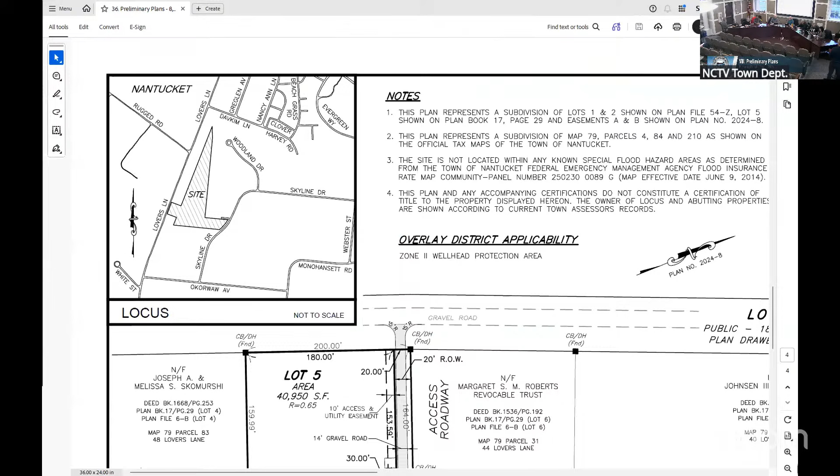So the property is located between Skyline Drive and Lovers Lane. I believe it's commonly known partially as Serenity Farm. There's a large barn out there, a house and a pool. Used to be some horse paddocks out there years ago. So the owner is looking to develop the property.

The preliminary plan here proposes 6 building lots. It is split zoned - a very small portion, a square portion of the property off of Lovers Lane is LUG 1. The balance of it is LUG 2. So that levels it out to work out in this way.

What you'll see overall in the property, starting all the way from the right, is a very long triangle. That property all the way to the right encompasses part of the town drainage system. There's a paper road under construction now for Lovers Lane, just as a general reference point. Then you've got a vacant lot in the middle, another vacant lot, and a very large, odd shaped lot in the middle right there. The purpose of that lot, possibly to be joined with another one, is to deal with ground cover. You can see in the middle there's a very large barn structure. They're trying to preserve that and work lines around it. So you'll see some funny lot shapes in there.

We've got all of the lots except for one accessing off of Lovers Lane. One property right now where the existing driveway is would come off of Skyline Drive. The intent would be to bring a small road off of Lovers Lane, access everything on the back with only one lot coming off of Skyline Drive. Other than that, it's a typical small rural road with a gravel road.

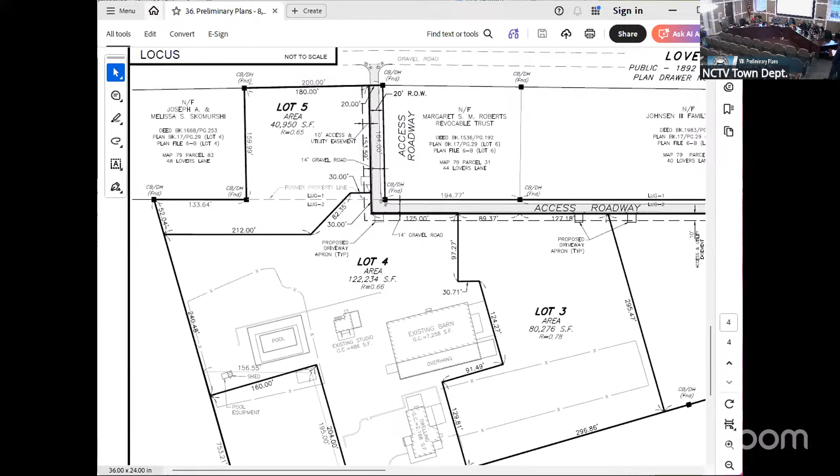So the lot at the end of the triangle with the stormwater, that's a LUG 2 lot, so it has to be 80,000 square feet minimum. But isn't some of that drainage on that point? So the drainage is on that—the town has an easement over Lot 1. If you look, it's hard to see on the plan, but there's a dashed line that goes around. That's all drainage easement, that's all the stormwater system.

Can they build on that? Can you build on that? We cannot build on it. It has to be left as open space. It's part of the town system, which is good for you if you're at the end of that point.

So I think that works to your benefit. Okay, thank you.

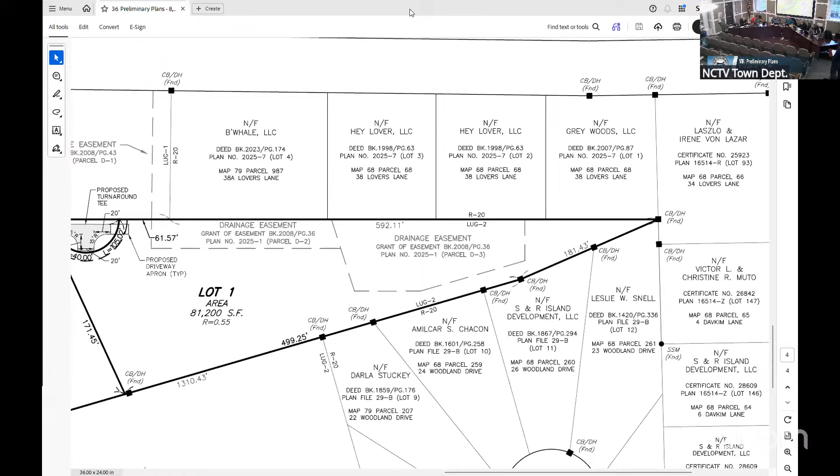Do we need to vote on this? Yes. Okay, so if there are no other board comments, I'd entertain a motion. Motion to approve the preliminary plan.

Did you have more to say, Haley? I don't mean to cut you off. No, I don't have anything more to say, but I think the things you really want to dig into will come at the next step.

So the motion's been made by Joe, seconded by Nat. All in favor? Aye. Aye. No. All right, that's three ayes and one no.

Can I just real quick ask Megan a question? I know Leslie's on and she recused—no, whatever—but this is what we used to do, and no one remembers the rural road alternative, and I've been thinking about the places we did it.

One of them is Westmoor Lane, that little thing that goes in there before you get to the actual Westmoor Club on the Westchester Street side. And that was...

...benefiting the look of the island, like not requiring these crazy paved roads that we didn't want. We wanted the narrower gravel, or maybe asphalt, but narrow, right?

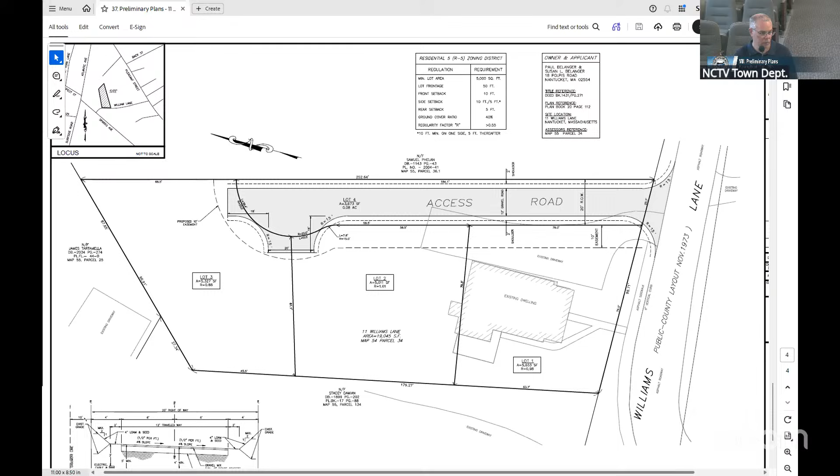Great, I prefer the rear lot myself. Let's do it - it's odd shaped lots. That's what it's for. Concerns, questions, anybody?

Well, again, I guess I would say - I don't understand why we're being asked to approve a preliminary plan of something. So a preliminary plan doesn't bind you or anybody else to anything. But it's not binding, but it is indicative. It's just confusing to say, okay, this looks great when I just don't understand it. It's not something that you're gonna do, so.

But it's part of the process, showing what can happen in a conventional ANR. That looks terrible, but it's legal. And it isn't really the right way to do it.

And then showing that proof so the real rear lot subdivision can go through the right process. Well, but it's also not possible to do this because it's short on frontage. No, that's there for the ANR. This has got enough land, it just doesn't have the frontage on the public roads.

So by doing an ANR, creating the road, they're getting the frontage off that road. Right, yeah, so we're creating the frontage. I understand.

Okay, so we're showing you a plan that if this plan were pursued as you're seeing it on the screen, it would require plan road waivers - waivers on layout width, roadway width, and several other things. But given the excessive size of this lot, we could come in here with a fully compliant 2-lot approval not required plan with a 40-foot layout and large cul-de-sacs, which would get us to the same place.

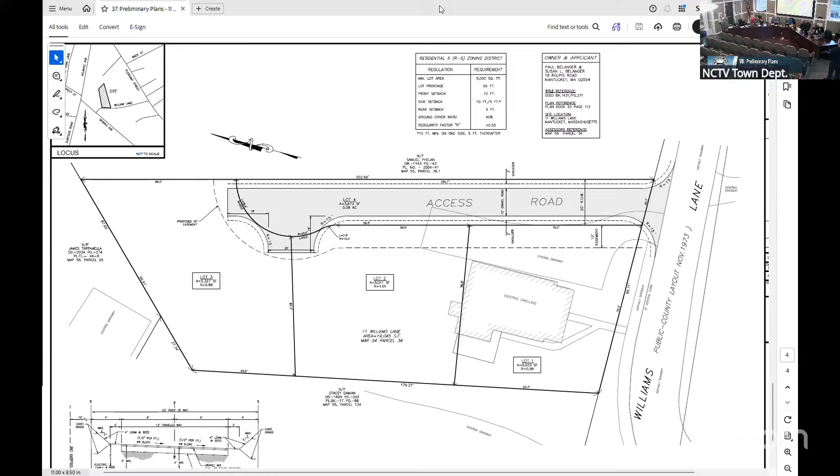And if it could just be clear in the minutes that this is not being asked to be built, right? Yeah, that's correct. So the approval of the preliminary plan is not binding. I wish we could come up with a new word for that, because we're approving a proof plan that isn't going to be what actually comes forward. I didn't come up with the process - the State of Massachusetts did.

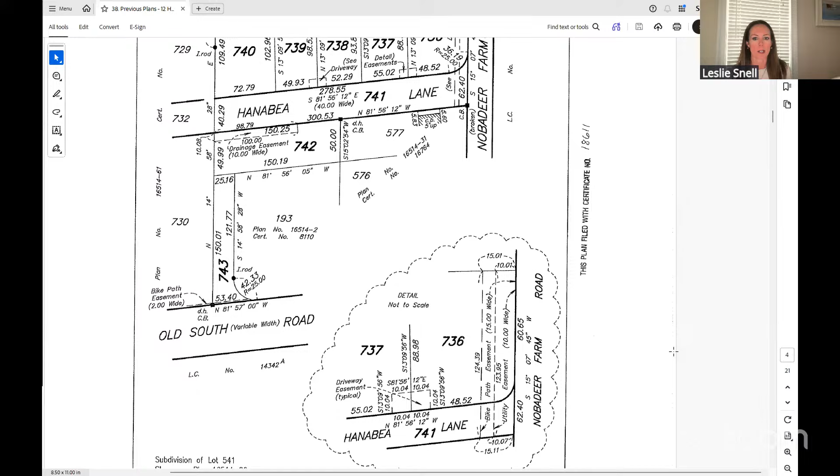So some of these easements were required, and those easements have since been released. I think this may be the last one, and it really does not make any sense to hold them to that easement at this point in time, and I would recommend that you release it.

Great, thank you, Leslie. And to add to that, thank you for dusting that one off the shelf for a little bit. So Nobadeer Farm Road is 30 feet, which is unbelievable. How did that just never get fixed 40 years ago?

I have no idea, but that's insane. So when the coffin pit got done, that's when the infrastructure you see now was put in from that approval. So this is way older than that. This is pre-Nat Lowell, exactly. I was writing letters in the paper. But this is because of the original plan we were trying to get some land to do something, but no one knew what we were doing yet. I don't even think Small Friends was built when this was done, but I think New School might have been, not sure.

So anyway, I'm in favor of obviously removing that, Dawn. It's good for people to know how these things happened, especially when it's in this century. Which is actually interesting - not one of those 1799 roads, Joe, look at that. Anyway, anybody else, questions, comments?

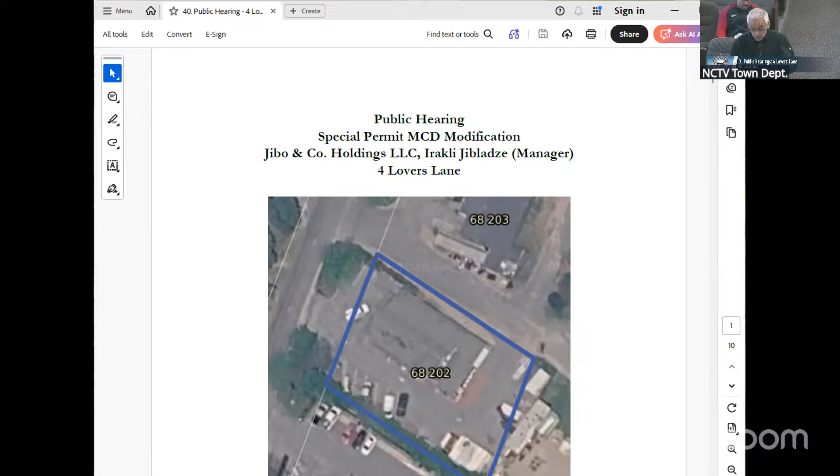This property is located at 4 Lovers Lane. We were before you last month and received approval for an exterior seasonal, six months at a time, area to be located on the property for a workout area on the exterior of the site.

That required the reallocation and relocation of some of the parking. That was discussed at the last meeting. At that time, the fact that there was a tent that had been erected on the property, and I had not asked for a special permit for the tent, as the tent would exceed the 30 days allowed per calendar year.

So we're before you tonight to ask for the erection under 139-2A of a tent for a period exceeding 30 days per calendar year. Applicant is requesting to erect a 15 by 30-foot tent on the subject property seasonally for a period of six months. Having said that, the tent is currently in place and had been erected prior to the first special permit meeting.

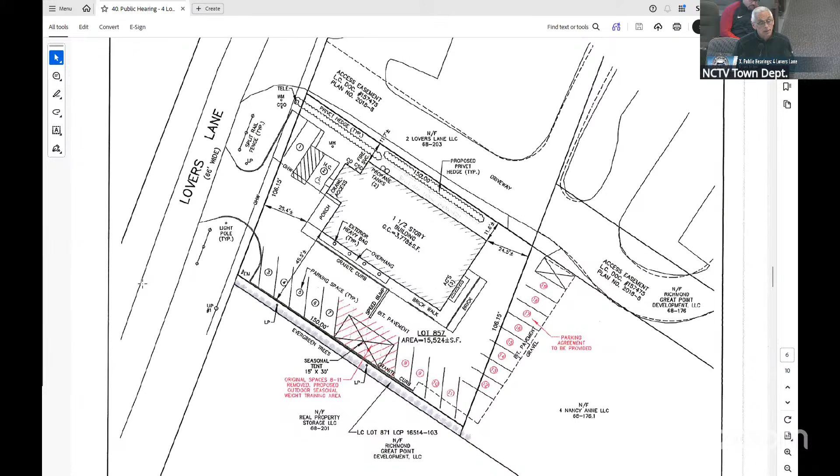Before we get to Andre, Paul, did we discuss a one year review? I believe we did. If we didn't review that first, we should have that after the first season of operation. So it would be number 6 then, Meg. I think this is definitely appropriate. Even though it's not actually tied to the restaurant, I think it would be tied to the last approval. So what are we looking at for time that you really want?

It's 6 months. No, no, I'm talking about Andre, the hours of operation.

You have to introduce yourself for the record. I'm Andre Dobrczynski, owner of the gym, 4 Lovers Lane, Verdun Training Center. So the population that we attend, mostly workers in Nantucket, they come at 4:30 AM and leave before 7 AM.

That's the gross part in the morning, when there's nobody around. Then after 6:30 PM, which is all workers that finish their work at 6, 5:30, take a shower and come to the gym, and they stay until 10, 11, and stuff like that. So those are the hours most important for us to attend these people and not get too crowded inside. Plus it's way healthier, especially in spring to summer and end of summer, to be outside instead of inside. They look for those times to be working out, so we wish to attend our people the best we can.

Before I go to the rest, did you say 10 to 11 PM? I wasn't sure. So 4:30 to around 7:30 is the gross of the workers that leave to work in the morning. And then after that, after 6:30, I had people leaving at 11:55 on Friday.

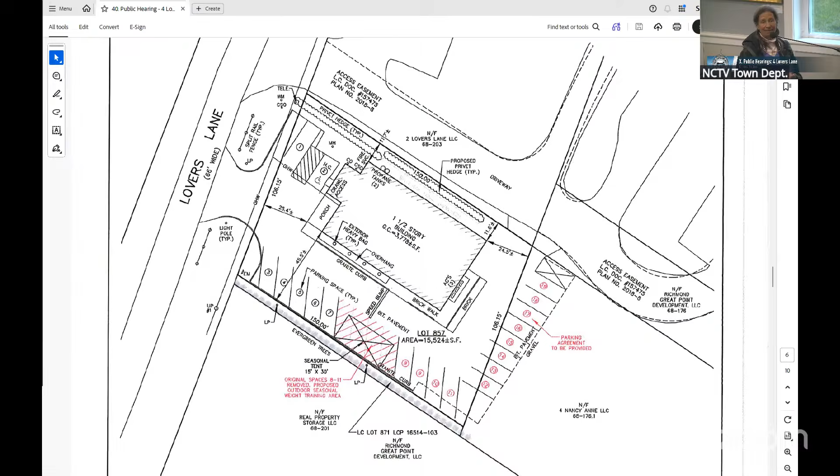So then the idea is, well, okay, is there a time frame from 10 to midnight that seems available, or pre-7:30, outside of the noise bylaw?

I guess my thing would have been to see 10:30, 11 o'clock as something that would be part of something outside of what already covers outdoor situations with the night skies and the noise bylaw. So those were just my thoughts. Okay, thank you.

I wanted to ask a question of Billy and Meg. The conversations that were had where people came in to talk about this application, I think my understanding is it was about parking. Did anyone come in to complain about noise? No, no, it was all parking, just related to parking. They didn't have a problem with the outdoor gym. Nope. No. Okay, thank you.

Okay, thank you. Yes, Mr. Sullivan. My name is Brian Sullivan, and I want to speak in support of the applicant and the longer extended hours, to the point that Mr. Toppa made about what he's doing with the kids in the community and offering spaces and opportunities. So whatever later time you're willing to go with the noise bylaw, if there's adults in the gym and the kids want to be outside or vice versa, I think his service to our community is incredibly admirable, and I appreciate that he's here, and I hope that you can offer him the widest window with a review at the end of his 6-month window. But thank you. Thank you.

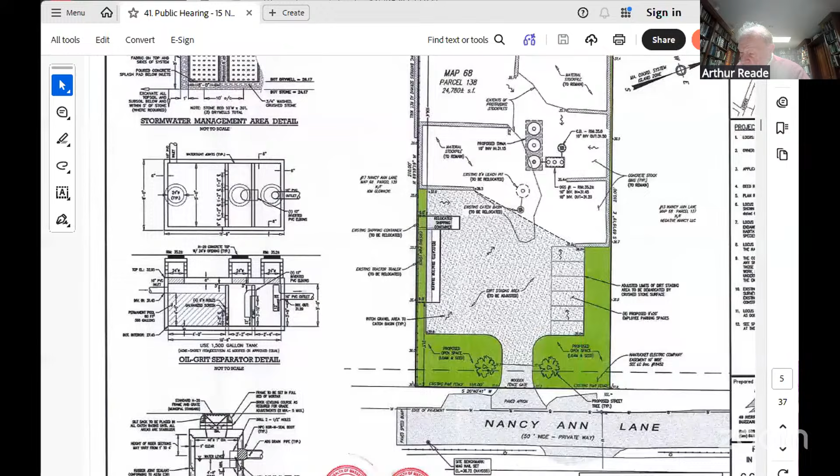This is for the operation of the tenant who has a yard here that is used for commercial storage of commercial or other construction supplies, stone and other aggregate, sand, piping materials, other general heavy construction equipment, heavy supplies, that is, not necessarily heavy machinery.

Obviously, trucks come in there in connection with this. The lot at present is a vacant lot. It's actually being used by my client at the present time, and we've come before the board with this application for major commercial development in order to lay out the plan and show exactly what we're doing and ask for the permit.

This property had been the subject of a previous major commercial development, which involved both this and the adjacent property at 13 Nancy Ann Lane. That was a large building that was going to be constructed, and that has since been abandoned by the owner, who has sold the property at 13, which is now owned by a landscaper.

And this property is being used, as I say, by the applicant, called Tonka Truck LLC, for the purposes that I described. The site is not open to the public. There is no public access. There are no on-premises sales, and there are no structures proposed on the property.

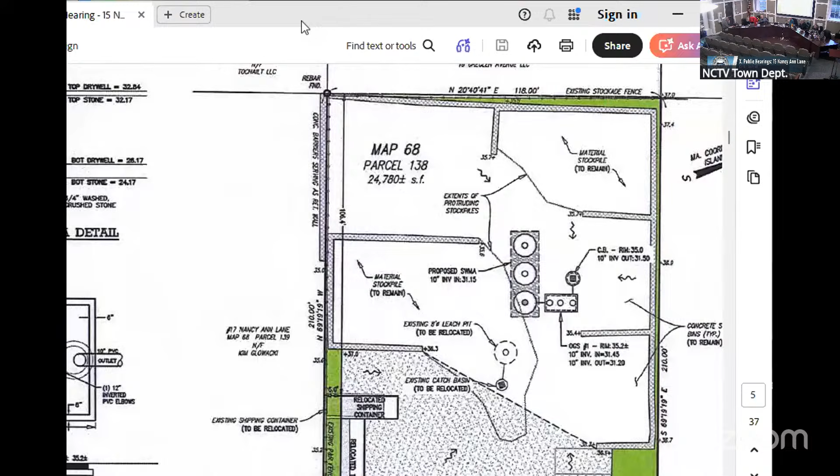So right now, we don't plan them. Yeah, because I- so, no, you don't. Oh, so that's the existing and that's the- yeah, so, but by moving that, I mean that's the right place for that one. Right, they just need another one, here. That's what I'm saying. Okay, not moving it, but add. Yeah, just add on, that's my more question.

We would have to add a catch basin where the parking spaces are shown and then run another pipe to that little grit separator, if we were just going to pave where the parking spaces are.

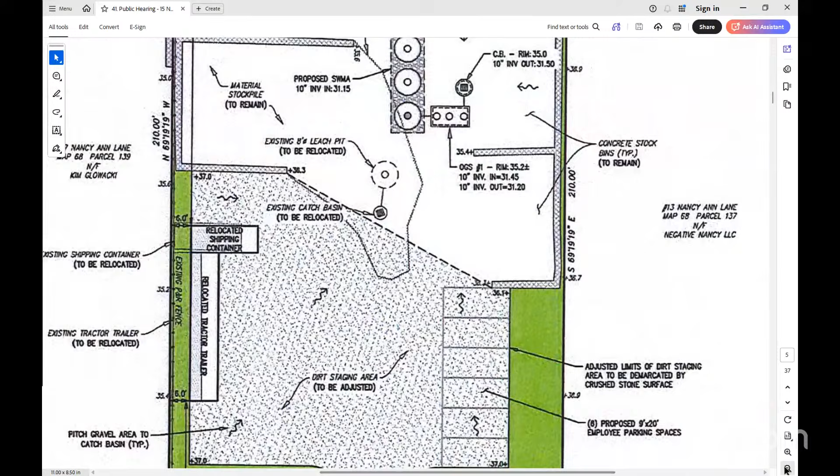Thank you. I mean, I'm in favor of it, and I think we've been remiss in doing it earlier, to be honest.

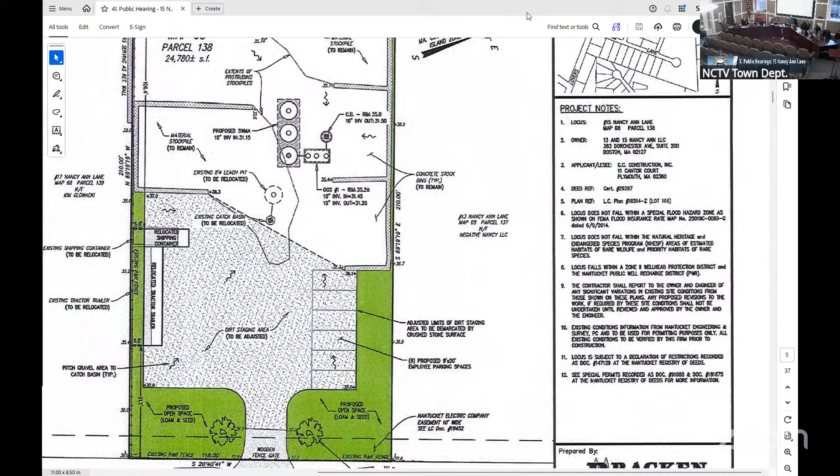Board members, we good? Public? Anybody in the public before we close the public hearing? No more hands are up, no, online.

Okay, so I'd entertain a motion. Motion to close public hearing, seconded by Nat. This is to close the public hearing. All in favor? Aye. That was unanimous.

So I appreciate all the discussion about protecting the wellhead. I completely support those ideas.

I'm trying to think about how this storage use of these materials lives happily in this area that is gentrifying into more of an affordable housing area. We really want to have dignity for the people living in these more affordable areas. Can we have screening? I just think we have to give this a little more attention to the livability and how well it plays with its neighbors, because we are encouraging this. We want this to become a nice neighborhood.

Yeah, I don't disagree. I think, Hillary, you have to remember the uses that exist for this neighborhood and have existed for a while, like Cape Cod Express, huge big trucks, there's a storage facility next to them. Right, but it is changing, and we've got Dylan pointing out that we have another application where we're going to have houses, there are houses right across the street. No, I agree, things like screening, I don't know, what do you think?

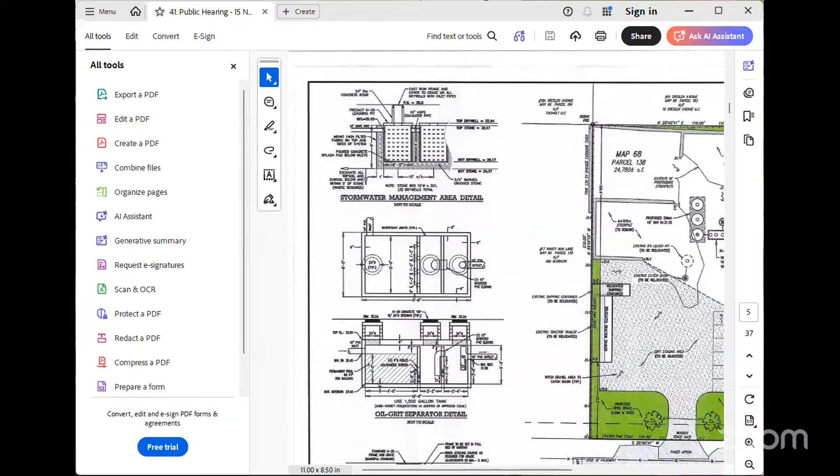Okay, Dawn or Chris, can you let us know what your planning for screening is? On the plan, we're proposing 2 street trees. As you know, there's nothing in that place right now, just grass in that frontage area. So I guess I would leave that up to Chris, what he thinks and what screening he would be accepting to put in there.

Well, I don't have any objections to some more landscaping, whether we put a hedge across the front, or even a small berm—maybe like a 4-foot high berm—and then put some evergreens on top of the berm. So when you're driving down the road, you'd be looking at maybe a 5 or 10-foot grass area, and then a small berm with the shrubs on it with some bark mulch. And then we would probably do some kind of split rail gate fence in the front for now.

I would note that this is round one. If we continue to go forward, there'll be a second round. We just couldn't get it together quick enough. So that kind of answers the screening question.

The area is still heavy commercial. There's the fish company, there's FedEx. I don't even know what's in the old Frito-Lay building anymore, but there's certainly some kind of commercial activity going on there. There's a landscape company that's just moved in, putting up a storage building as well. I have no idea what's going to go on to the left of me, which I would think would be the west.

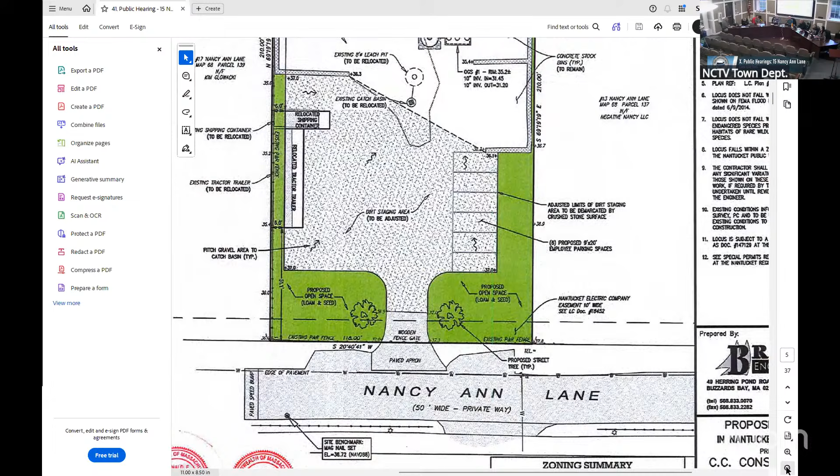As people have mentioned, it's an extreme improvement from 10 years ago. The other part of this is that I believe we have 60 days to complete this work from the approved application—is that correct? No, I don't think so. Okay, I don't even think there is a time frame, is there? Do we—thank you for those comments, I appreciate them.

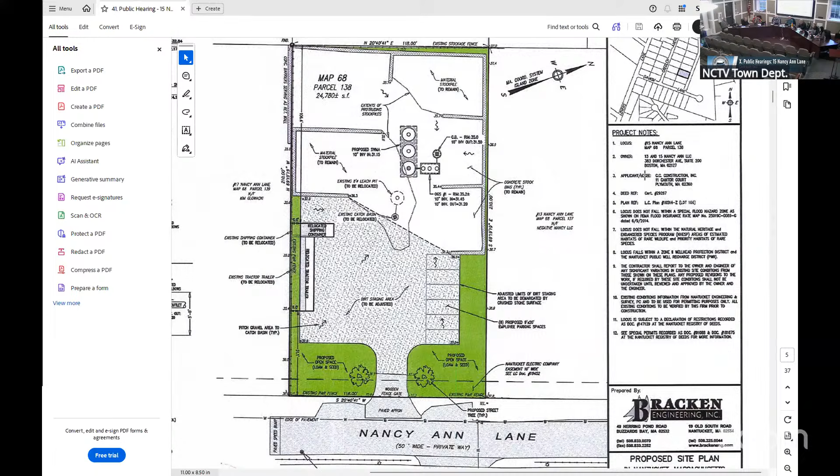The shipping containers and the trailer—are we permitting those under this MCD? Yes.

And Chris, are you done? I think so. Regarding the screening, I do appreciate that all along that side of Nancy Ann Lane there are comparable or worse uses of land, but all of the people who live in apartments on the other side are looking into those areas, and we'd like to improve things for them, slowly, bit by bit, in little ways as we can. So I appreciate the trees, the grass, and I would just suggest I'm fine with staff approving some kind of a plan for screening that you think will be friendly to the applicant as well as respectful of the neighbors, and move things in the right direction that we want to see this area going.

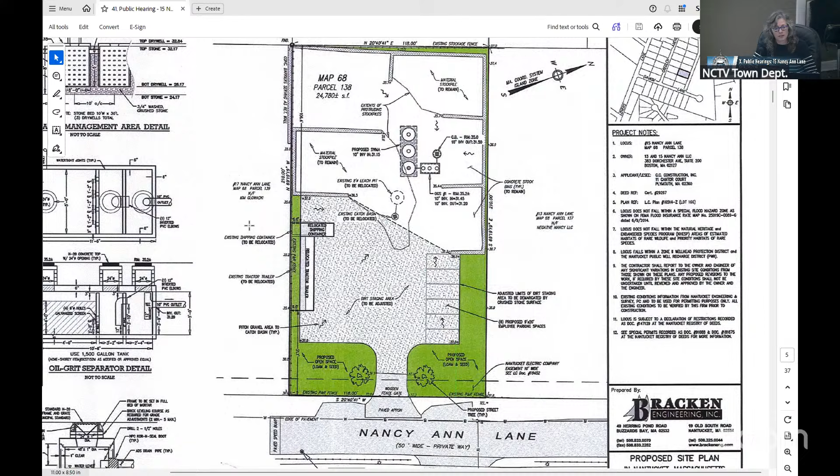I agree, I think a small berm would go a long way in helping the look, the concern about blowing dust into the neighboring residential areas, and it would attenuate a little bit of the noise. I think as you face the property to the left, I don't know why he would screen there unless he didn't want to see the junkyard. I think behind him is contractor shops. And to the right of him as you face the lot, we're not sure what that is—that could be his phase two, I don't know.

I think we start with the screening in the front and along the side. Along Nancy Ann, that's what I mean by the front. Okay, and on one side I'm not sure I would until things change. Yeah, screening along Nancy Ann is what I'm most concerned about.

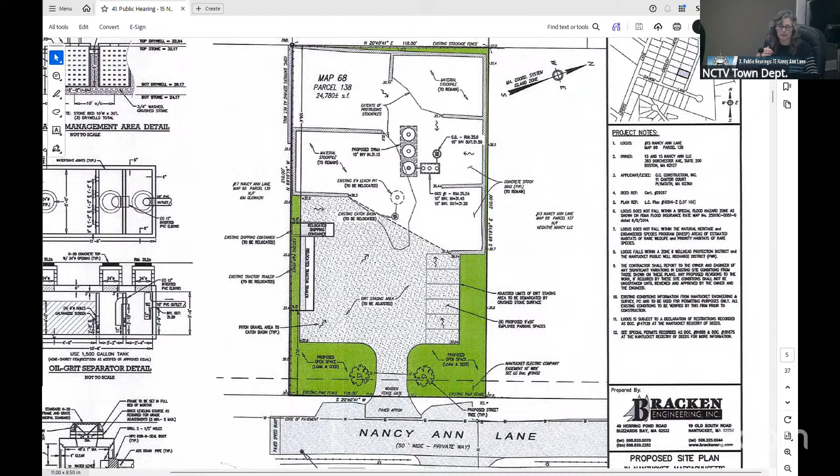And we can, you're fine with staff approval on that. I am, and even a fence makes a big difference. Sometimes a fence is better than vegetation that deer eat, and we don't need this to look like a golf course. No, but it definitely can look nice.

With a little bit of work, so that's it. We'll have staff approve, and yes, this.

What this looked like 11 years ago - Joe and I used to go to birthday parties over there. Joe's a lot younger than you. No, he's not - I used to work there when I was 14, in Sconset, cutting hedges, and he was over there. And we used to ride mini bikes at the parties at Naushop, way before it was Naushop.

We've slowly moved everything out of the real residential Nantucket and ended up out here where it used to be, but much less. And of course towards the Coffin Pit and the airport bunker area has been the natural movement of what used to be Reese's, Toscano's on Pilgrim Road. People don't even know that. So it's like, I get what Hillary's saying.

She's not wrong about saying the people that are living there, they have to look at this. I just don't know what the answer is. When you go to Boston and stay in a hotel and look out the window and there's three big gigantic cranes building a building 10 feet from your window - that's like what, and those people are paying $250 a night to stay looking out at that.

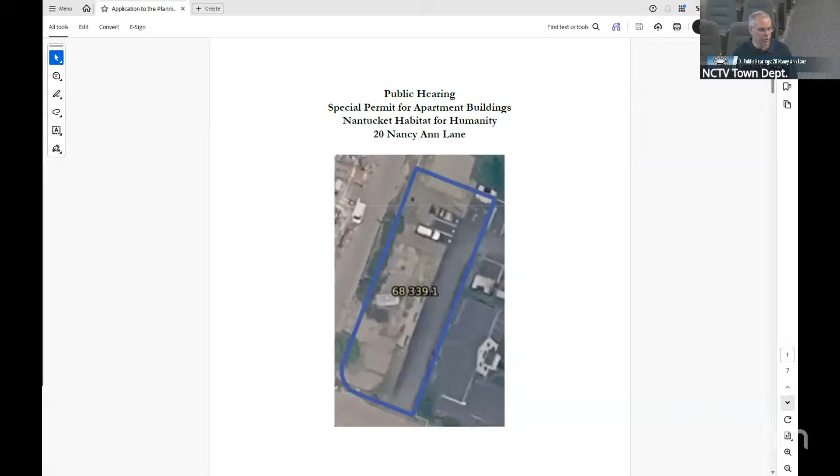Good evening, Dan Mulloy again. So before you this evening, 20 Nancy Ann Lane. Habitat for Humanity, as you heard a few minutes ago, is under contract to buy the property as well as under an agreement with the Nantucket Affordable Housing Trust to acquire the property, putting some restrictions on this in terms of affordability.

So what the application is requesting is a special permit. In the CN district, apartments are allowed by right, but require a special permit from the planning board. There is no relief requested as part of this application—it's strictly a planning board review for the special permit process.

The proposal is 4 buildings, 2 bedrooms per unit, for a total of 8 bedrooms. We're providing 8 parking spaces as required on the site. The site has enough area to comply with zoning for the 4 units—you might even be able to get 1 more, but we're only asking for 4.

Access to the site is provided by Nancy Ann as well as the existing driveway complex as part of the Richmond development. The driveway and most, if not all, of the infrastructure to support it is already in place—the roads, the utility stubs. Essentially it's a vacant building lot pad ready to go. So that's the application: 4 separate dwellings, 2 bedrooms apiece. It is Habitat for Humanity, so obviously it will come with some restrictions in terms of affordability. With that, I'd answer any questions.

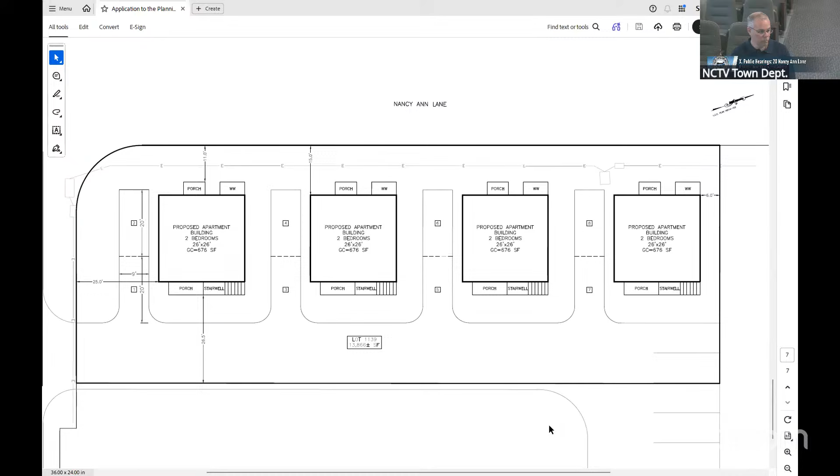Thank you. Board members, questions? It's pretty straightforward. Is there anyone in the public who wants to speak to this? No hands are up online. All right, got incoming.

Welcome. Hi, good evening. Thanks for letting me speak, everyone. Sorry, Campbell Sutton—I forgot who I was. My apologies.

I know it's probably not appropriate to speak against the design on this, but I'm gonna jump in anyway. The look of this reminds me of the road approved with 5 or 6 buildings—Rupert's Way, on Old South Road. As you know, over time I've spoken about stacked parking, and I personally don't think that it lends itself to friendly neighbors.

It usually ends up with cars trying to find someplace else to park because they don't want to park the other person in, or they have to leave early. So there's a lot working on that. And the thing that came to mind on that Rupert's Way is something more along the line of...

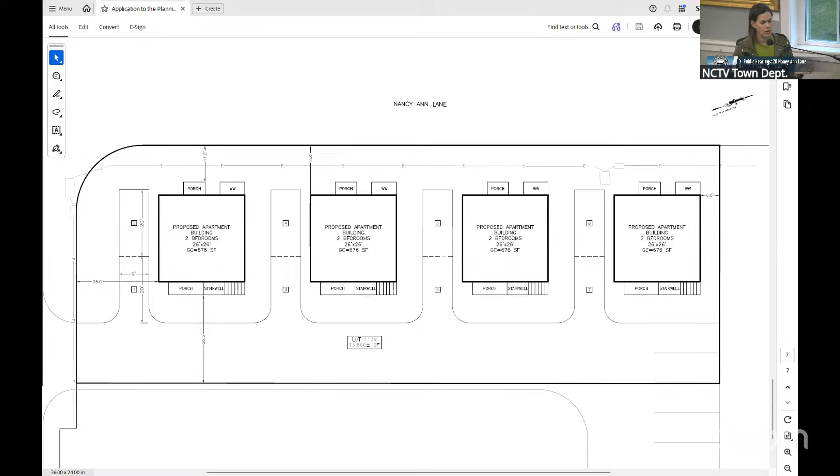Liza: Hi, I'm Liza Haddon. I think that the parking could work either way. I think if there's enough room between the buildings, it would be great to do them side by side, but I'm not sure there is. I think one thing you've discussed on previous apartment buildings is storage outside or underneath the buildings, and I'm not sure how much jurisdiction you have about that. But having a small apartment means there isn't a place to put your scallop rake or other beach stuff, so having something underneath the building or on the side so you can put your stuff there and it's not just in the yard would be great.

Great, thank you, Liza. These do have basements, correct? Yeah, all the buildings have basement spaces with walk-downs, so there's basically storage there. These are single-family homes by definition, but they're apartment buildings, essentially single-family apartments. So basement for storage and then two floors above that for dwelling.

Correct, basement storage, two floors above. We looked at other options for laying this out, between trying to provide parking, separation, and code requirements between buildings. Trying to squeeze everything and double up the parking just didn't fit, but we wanted to have as much green space as possible here as well. Yep, I mean it's really close, just a little bit here or there that we couldn't get.

I agree with Steve, if we could get the tandem parking, you'd have more yard space, but maybe there's something. For reference, if anybody's seen it, these buildings are going to be similar to what they put up on Waite Drive, for a visual, that's the intention. Or every other one, perhaps, with tandem parking.

Mr. Chair, we have Christy Parentella with her hand up online. Can we give them the option in the condition about the parking? Yes, you can give them the flexibility of that sort of site plan change through staff approval. Okay, great, if they finesse the plan a little bit more and massage it and it comes out, I think that's a win. Something to look at, to investigate. I agree.

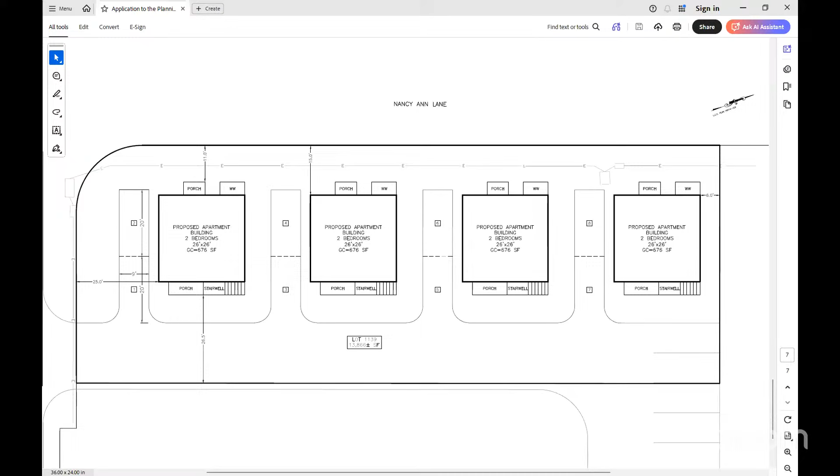Hi, thank you, Christy Ferrantella, the housing director. I just wanted to comment on some of the previous comments around parking. These, as mentioned, are acting as single-family homes. They're going to be two bedrooms sold to a family that earns between 50% and 80% of area median income. So I think the stacked parking makes sense since it's going to be basically one person per bedroom, and it's regulated through the state's Executive Office of Housing and Livable Communities, so it wouldn't be separate people able to share the units. I just wanted to give that information as background. Thank you, Christy.

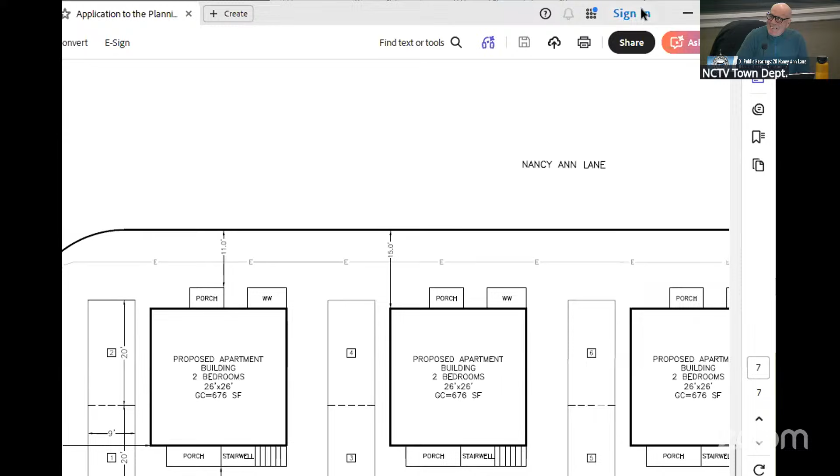Anybody else in the public? Steven, do you want to comment, or are you just stretching your legs? All righty. No one online? No, no more hand raised. I'm stopping sharing. It's really good.

I would entertain a motion to close the public hearing now. So moved, Mr. Chair. Second. Motion made by Joe, seconded by Hillary, all in favor? Aye. Aye. Can I get an aye out of you, Stephen? Aye. Thank you, that's unanimous.

Alrighty, I just want to thank Christy for letting us know about the affordability. That was one of my questions because it wasn't in that application. I think they go on the SHI list too. Yep, they go on the SHI list now. That's a bonus.

So I'm fine with this. Great, Stephen, you want to form your motion? Sure, I'll make a motion that we approve subject to findings and conditions of staff, with a modification to include, at the applicant's option, tandem parking versus stacked, and any configurations that will work, subject to staff review, noting that they may also use the 17-foot length parking space if available for them.

Second, for each unit. All right, motion made by Stephen, seconded by Joe. All in favor? Aye. Aye. It's unanimous. Thank you.

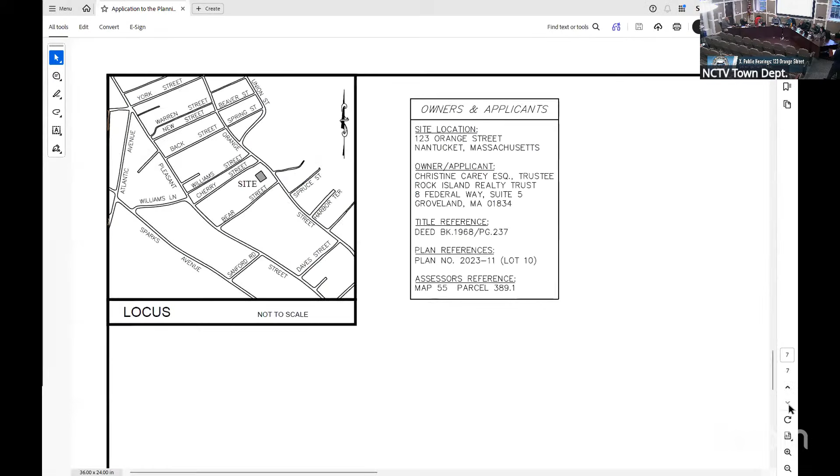Thank you, Dan. Okay, we're going to move on to Rock Island Realty Trust at 123 Orange Street. Howard, I'm going to tag you on this one. And this is, who's representing this? Dan Mulloy. It's the Dan Malloy show again. Dan Mulloy, it's going to be the evening of apartments tonight.

So 123 Orange Street, we have a property that's zoned CMI. It's about 6,200 square feet. In this district, there's a few different housing options available. So they can have a duplex by right, and you can also have apartments and or apartment buildings based on square footage.

So in this case, the plan before you shows a duplex on the top of the plan, which is allowed by right. And then we also have a second building, which is going to be an apartment, a 2-unit apartment building. So you'd have a duplex at the top, 2 units above with 2 bedrooms apiece, so 4 bedrooms in one building. Then a 2-unit apartment building with 4 more bedrooms, for a total of 8 bedrooms.

The uses and everything are by right, very similar to what you just saw in the previous application. In this case, we've got 7 parking spaces provided, which is what's required by the zoning code for the duplex as well as the apartments. And we have access provided by a way called Bear Way.

This was, for reference, off of Orange Street, but it's parallel to Bear Street. So there's a little confusion there as to where this actually is, and the lot in front of it is vacant. I believe there was a house there possibly years ago that was taken down, not that long ago. Yeah, so if you drive by and look at it, you can drive up Bear Way right now. The front lot, I believe, has a trailer out there and a few cars parked. The back lot we're talking about right now is vacant.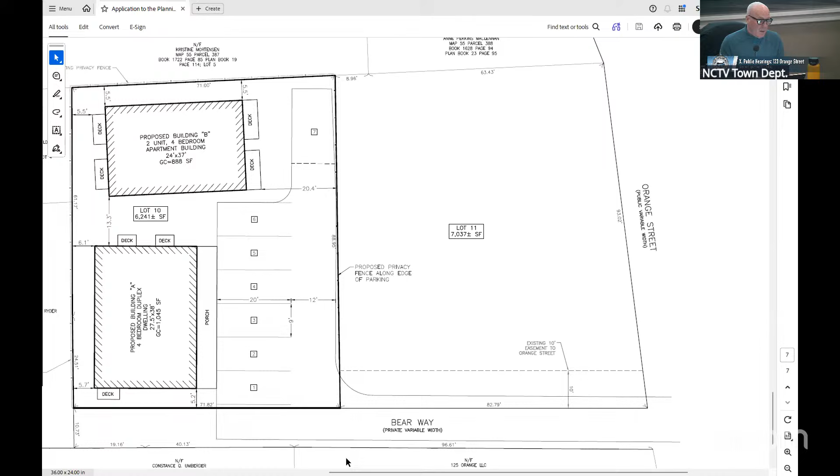So, I mean, it is tight, but it's all within code and, to be honest, I don't see a way to deny it. Nat, are you comfortable with the 12-foot width?

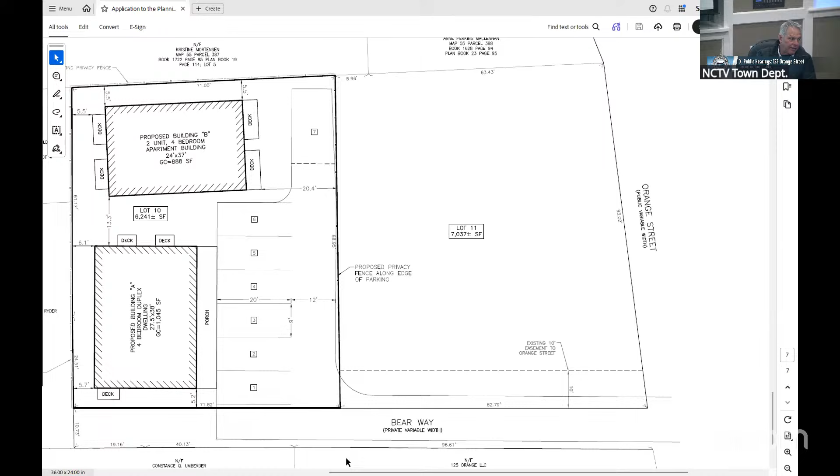Yeah, I mean, because what's gonna happen here, you're gonna see smaller vehicles for probably 80% of the spaces. Just so everyone knows, a Suburban is not 20 feet, it's like 19 feet 10 inches long. How big's the Tahoe, 17?

And they all turn, the steering radius, the front axles are different now. These vehicles turn tight. So I'm assuming there's gonna be a lot of smaller vehicles mixed in with that one stupid truck that doesn't fit right, but it's not gonna be every single space. So I'm looking at it as it'll figure itself out over time and people will figure out the best way to do it.

The best news about this project is that there is no traffic, so you could put a requirement that they never back out onto Orange Street. Nobody could say they can't do it, it's against the law anyway. You have to be able to turn around to get out, no matter what.

We don't have to be concerned about on-street parking here either. The people that live here are gonna either have a control spot or control the parking itself. This is reminding me of those places the hospital used to have, or leased on Hummock Pond Road. Every one of those little places, after the parts store, you can get in and out of internally pretty easily. Nobody backs out into Hummock Pond Road from those locations. So this will work, you just have to think about it differently than something we've looked at all the time.

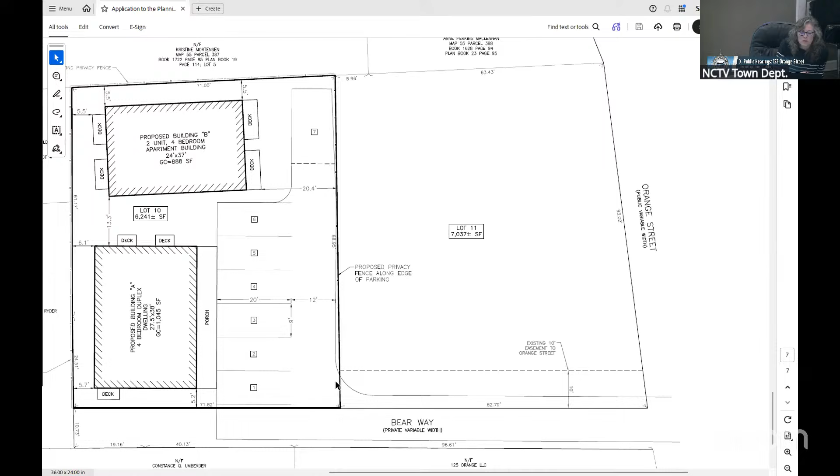The other crazy part is you have 50% ground cover allowed and you're leaving 37% or 36% ground cover. You're limited because of the parking. This could be a mixed-use commercial application in the CMI, and it's also in the MIPOD district, which, if pursued, would have the right under the zoning bylaw to claim all kinds of parking credits. Theoretically, this isn't what we're doing, we don't want to do that, but theoretically you could do more here under a different type of special permit and almost have it all by right.

May I make a motion to close this discussion? You can make a motion to close the public hearing, but let's make sure there's not someone lined up, anyone online, anybody in the building? So I'm making a motion to close the public hearing. Second. Motion made by Howard, seconded by Joe, all in favor? Aye.

As for the merits, I'd definitely like to see an apron added into the conditions if it's not there already, an apron interior to Orange Street, cleaning up that apron. I don't think there is an apron there currently. But the curbing, making sure the curbing is flush.

There shouldn't be any bump situation, and you've got to remember there's a nice crosswalk there to the Goose Pond. Whatever they call that little thing there for the railroad bed. I think we should have the applicant coordinate with staff and DPW on the spec. That's what I was gonna say, have DPW review what the right thing is to improve that spot. I also have a concern about the easement and how that's dealt with, plantings.

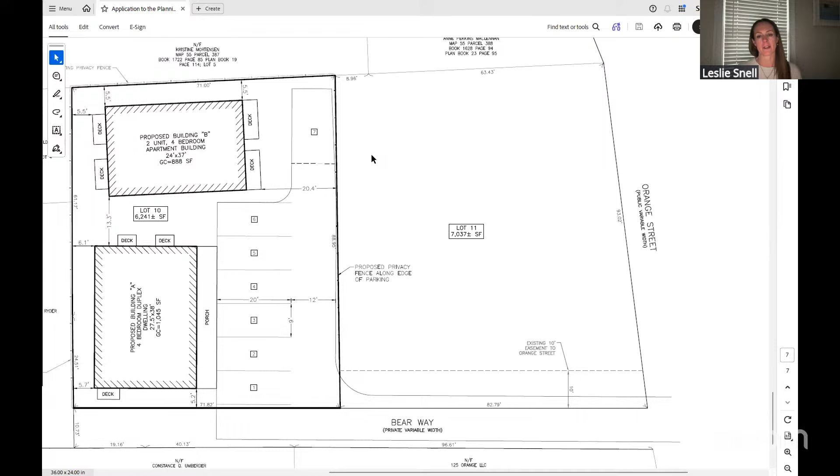Leslie has her hand up. I just wanted to add to the condition about the DPW and coordinating work with them as needed. There is a sidewalk on this side of Orange Street that could be impacted, so I think that should be referenced in the condition.

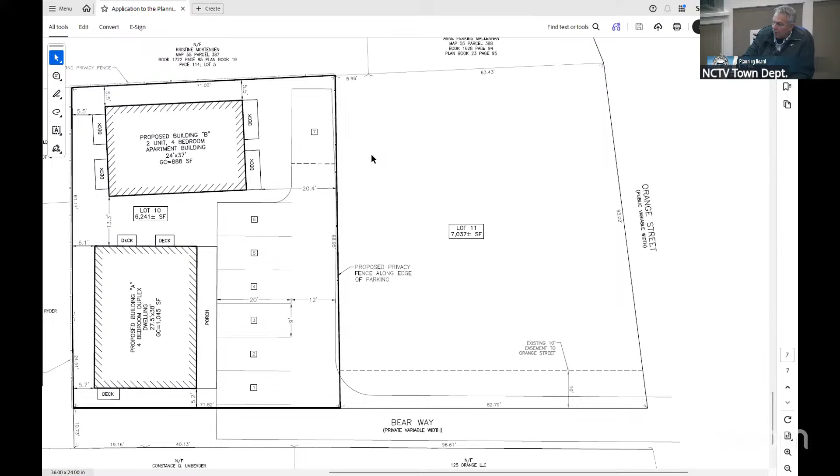Okay, well that's what I meant, making sure I have to look at it tomorrow. I can't think of what it looks like in my head, because the sidewalk in front of that commercial building is fixed and it's probably square, so it needs to be flat or easy to clean that up. Are those still there? The privet? Yeah, that's an old picture though. It's still got the house there. Everything up front is gone, it's open to the street, I don't think the privet's there anymore. Oh, all of it? The privet's gone. Oh, that's right, sorry, you're right.

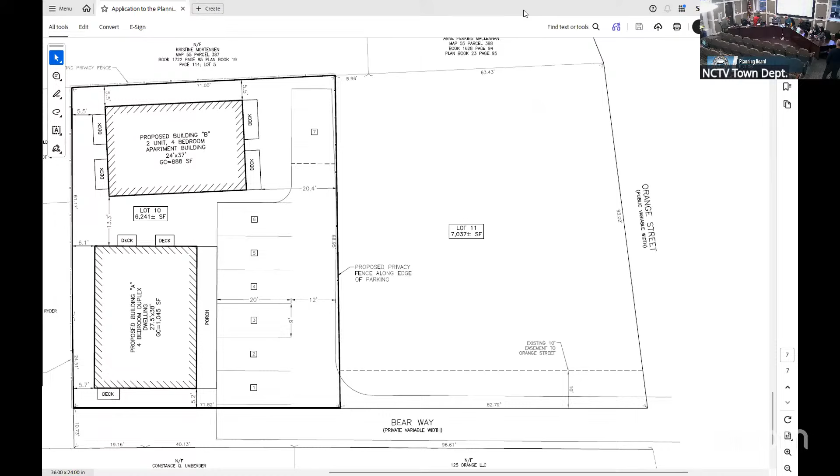Can we also put in the conditions the width that we discussed, of 12 feet? Yep, 12 works.

Okay, anyone got anything else to add in? I would entertain a motion.

Howard, go ahead. Take one. I'd like to entertain a motion to approve this with everything that Megan knows needs to be included. I think you get better than that. That was good, Tom, I like that. All right, let's like rubber stamp that. That was on the fly.

Do we have a second? Second. All right, motion made by Howard, seconded by Nat. All in favor? Aye. That's unanimous, I believe. Thank you, Dan.

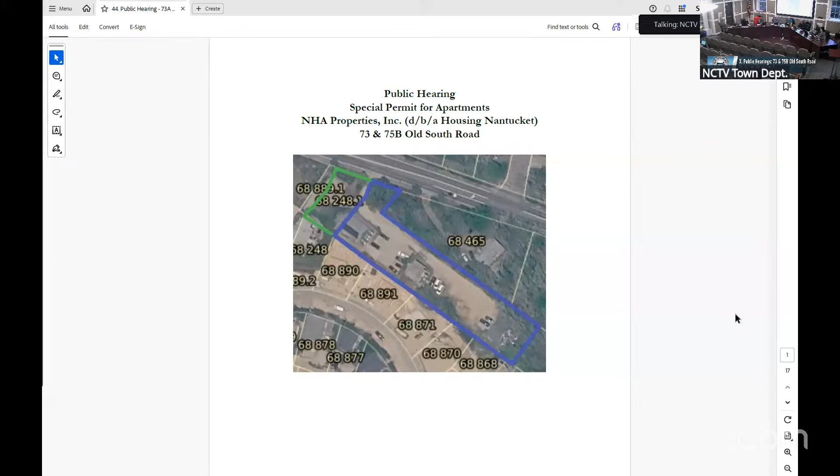We are on to Mr. Arminetti, NHA Properties, DBA Housing Nantucket, 75 Old South Road. Welcome, Dave. Thank you, Mr. Chairman, good evening. Figure after 78 straight applications, we'll give Dan a break on this one. Nice to be before you all again this evening. Dave Arminetti, Director of Real Estate Development for Housing Nantucket. Still getting a little used to saying that, but I'm proud to say it.

The application for you tonight is a special permit to allow us to essentially complete the build out of our campus on 75 Old South. Most of the board will recall this was an abandoned portion of Miller Lane that was disposed of through an RFP process to Housing Nantucket back in the summer of 2010.

Since that time, we've built out our office, which is on the far left, a little over 2,000 square feet, primarily our office with a couple of small subtenants, including Habitat and a general contractor. We've also built 2 one-unit apartments, pointed out on the left and right of the portion of the premises we're seeking approval on. Those are 1-bedroom apartments, both move-on structures over the last 5-6 years, that have been tenanted the entire time. So the whole site is split zoned, as pointed out in the staff report.

The portion we're seeking to develop on the right is all CN zoning. The leftward portion, 73 Old South, is actually still a remnant of R5 zoning. What we're seeking to do is develop 3 one-bedroom apartments on 3 levels: a basement apartment, first floor, and second floor. Essentially what we have is a math equation with some associated planning considerations. We require a special permit to develop more than 4 units on a single lot, regardless of the size of the lot. Under the underlying zoning we could develop 9 on this site, but the way the apartment definition is written, there's a requirement for a special permit if you're seeking in excess of 4 units on any lot.

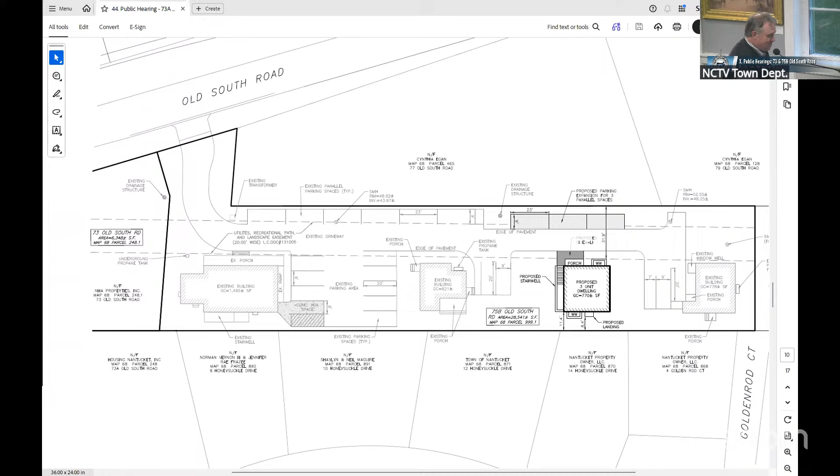And it goes without saying, but given that it's been, I think, 2 years since I've actually submitted and processed an application. We do appreciate the staff's effort. We don't take that for granted, and it's still great to see how efficient the organization runs here. It really is a pretty well-oiled machine. I know you guys get your fair share of criticism, but you should take credit when credit's due. No, the next one will be harder. Thank you, Dave, and we appreciate all the effort that the housing folks put in to creating it. Well done, Dan. Thank you.

Just as we're closing the meeting, I wanted to let everybody know that I followed up with Megan after our discussion about neighborhood employee housing at the last meeting. I took some time after the meeting to look into the history of the bylaw because it came up in the meeting and we didn't really know.

What I shared with staff and I'll share with the board and the public is that the neighborhood employee housing, we put it in 2001, and then we revised it to its current form in 2013. In 2001, in both forms, it was limited to a maximum of 18 people in two dwellings on one lot. But in 2001, it was actually limited per structure as well. It was, I think, 9. Don't quote me on it, but there was a limit per structure, and that sort of fell away.

And then also there was some work on Martha's Vineyard that we might want to look at. So I just wanted to share that because we had a pretty intense discussion, and nothing to do now, just FYI, maybe some things for town meeting whenever that comes around again. And I'm happy to put it on an agenda for a more wholesome discussion as well.